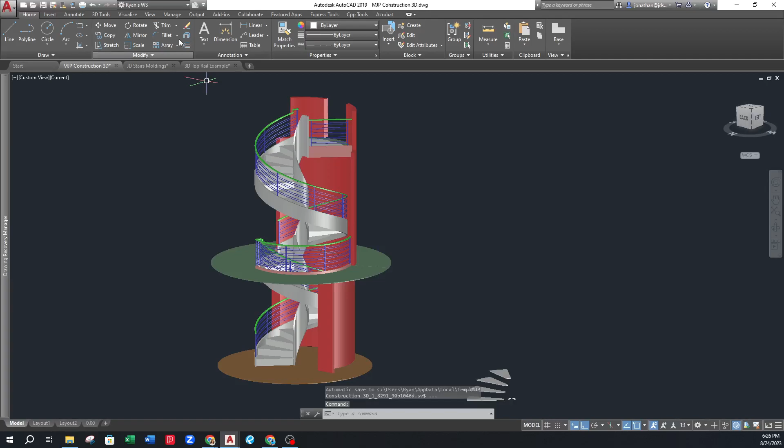This was just a stair that a client sent to me, and he was having some problems getting this rail to work. And so I thought I'd make a quick video on it. So I just copied these same treads over here just so we don't have to have a whole other model in our model while we're working.

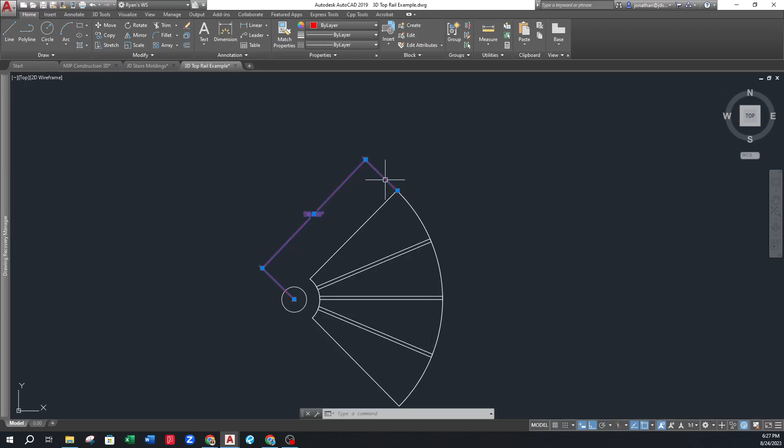So the first thing you want to do is you want to find out what your radius is, or wherever you want the center of your railing to be. So in this case, we're just going to use the outside edge of the tread for ease. But if you had a handrail that was here, let's just say it was 1 inch in, you'd want a radius of 57, if that makes sense. But for the sake of this, we're just going to go to the outside edge so you can see.

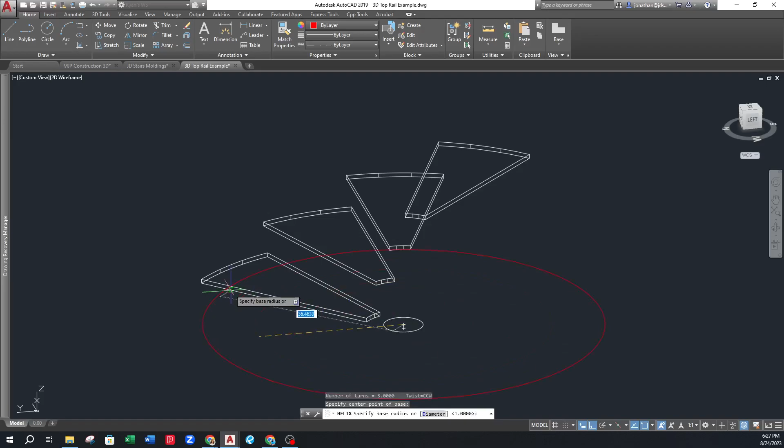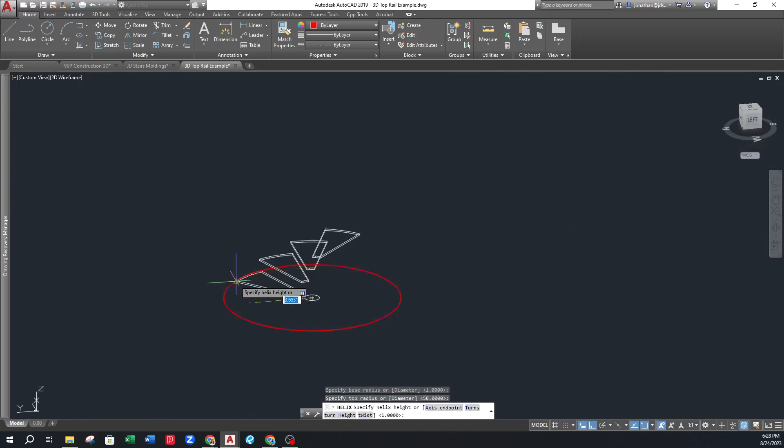So the very first thing you're going to want to do is you're going to want to draw a helix. And you want to make sure that you start your helix where you would want your handrail to start. That's really the only thing that you need to make sure of when you're doing this. So it's just asking me to specify the top radius or the diameter and the bottom radius or the diameter. Now, those don't really matter because you can change those in the properties later.

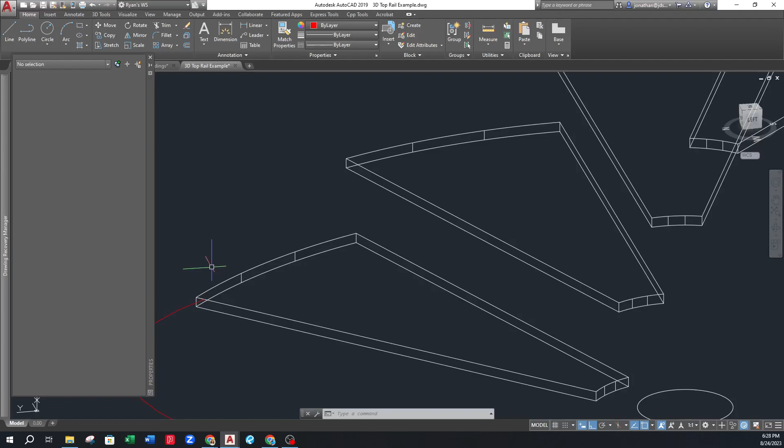Even if, let's say, I decided that I didn't want my rail to be to the outside edge, I could come here to the properties and say that I want the base radius to be 1 inch in. So I'm going to go 57, and the top radius, obviously I want the same, we'll say 57. And then now you can see that that is 1 inch in. You can also see that this is going counterclockwise, which is the opposite of how our treads are. So we can change that in the properties as well.

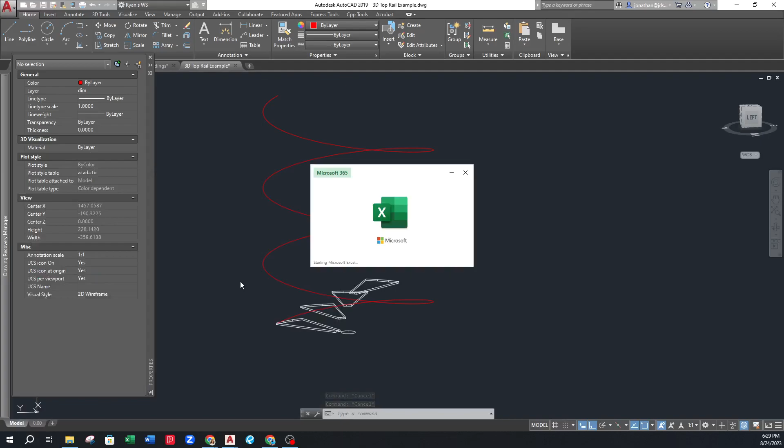Now this is the part where we have to use what we call our weight calculator or our spiral calculator in order to get our helix to what we want. So I'm going to go weight calculator. And this specific spiral had 16 treads around. The rise was 134.125. So this would be my helix turns. So let me see if I can do this. It's probably not going to do it on both my screens, but

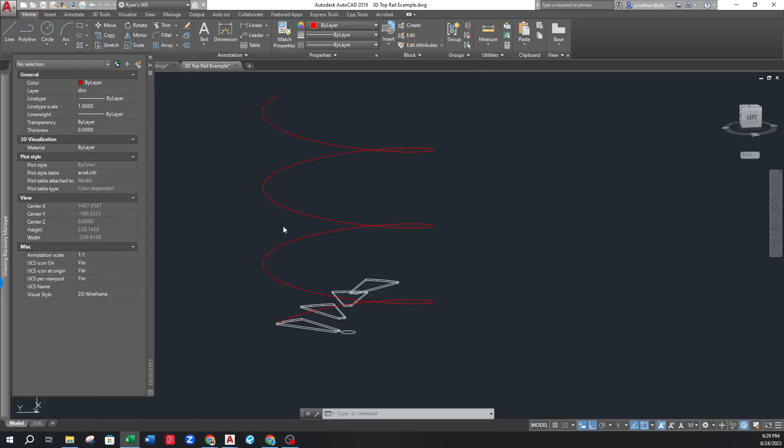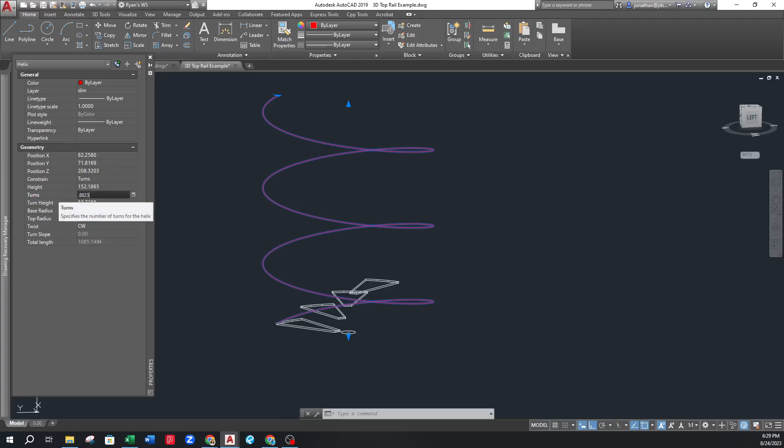so right here where it says turns and it says currently 3, oops, that's not what I wanted. You would want to put this 0.882353. So we're gonna go 0.882353, and we're gonna hit enter. And obviously this is not the height we want, so now we play with the height. So it's currently at 152. So let's try 118. And then that looks pretty dang close.

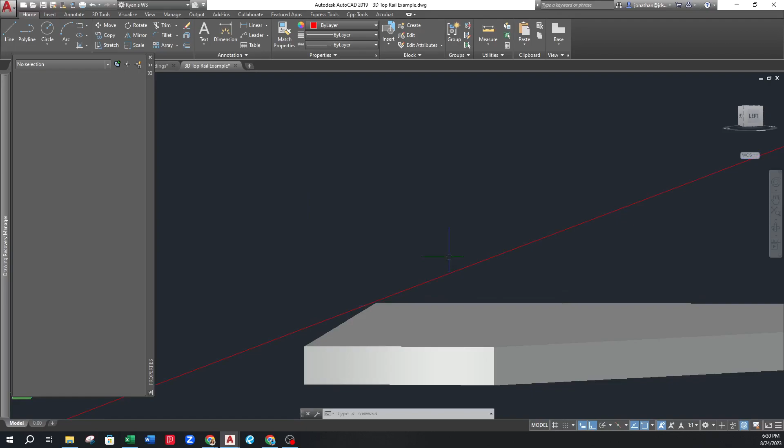Now you don't want it to be intersecting the tread, but you want it to be just right at the nose or right above the nose, because again, this is going to become your top rail. So the closer you can get that without it going through the treads, it's going to give you a better result. It's going to be more accurate. Okay, so now we have our helix. I'm going to move this out of the way here.

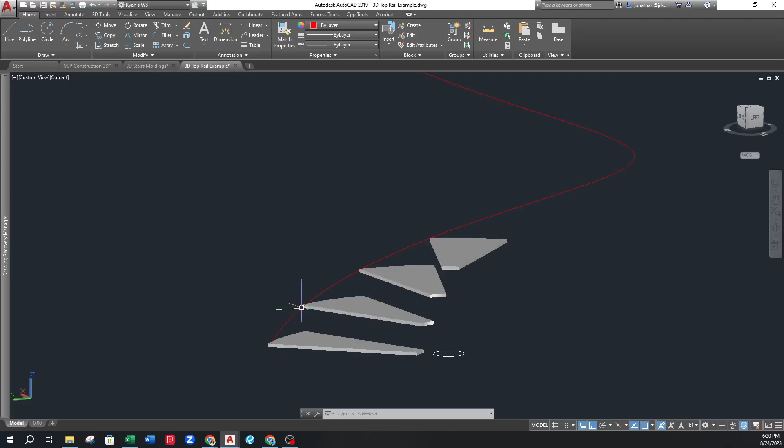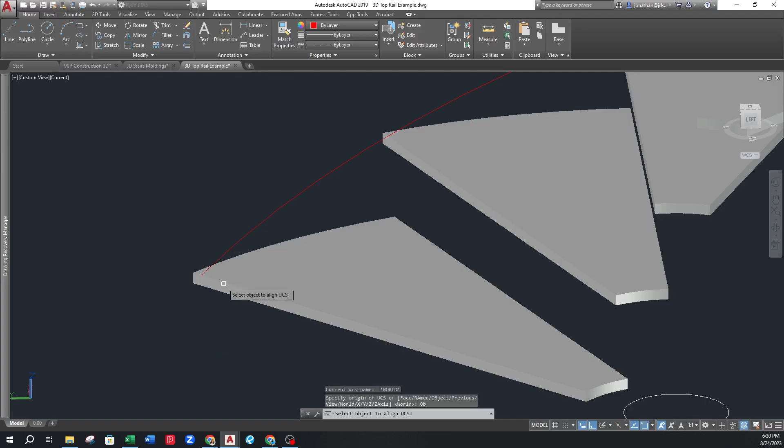So now what do we do? Well, we have to align our UCS with where we want our rail to start, which would be here, right? So let's see what it's doing right now. So you can see when I draw a rectangle, that is not the view we want. So how do we align our UCS? So on mine, I can hit 5 and select an object to align my UCS. But you probably don't have that, but in our company we do.

So you can type in UCS, and it's going to ask you to reassign the UCS origin. So we're going to put it right here. It doesn't really matter as long as it's along this plane. So I'm going to put my X this way. Oops, I don't think that's what I wanted. I think I wanted my Z to go back, yeah. So I'm going to do that one more time. I want my X here. Gosh dang it, why can't I get it? I want my X to go this way.

It's not working. It's giving me fits, isn't it? Okay. What is happening? Here I am trying to teach and it is not working. Okay, there we go. That's what I want.

So when I draw a rectangle, you can see that now it's drawing it as the same plane as the front of where I want my rail to start, or in this case, the front of the tread. So we're going to go ahead and just draw a rectangle. Let's just go 2.5 by 1.5. Okay, so this is where the magic happens. So I'm going to take my helix.

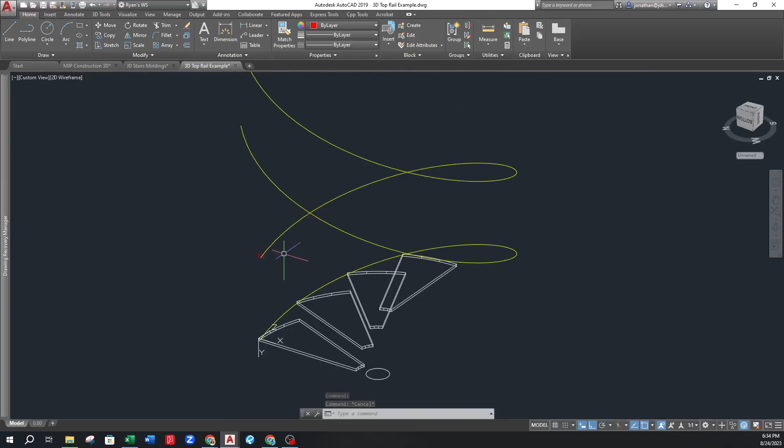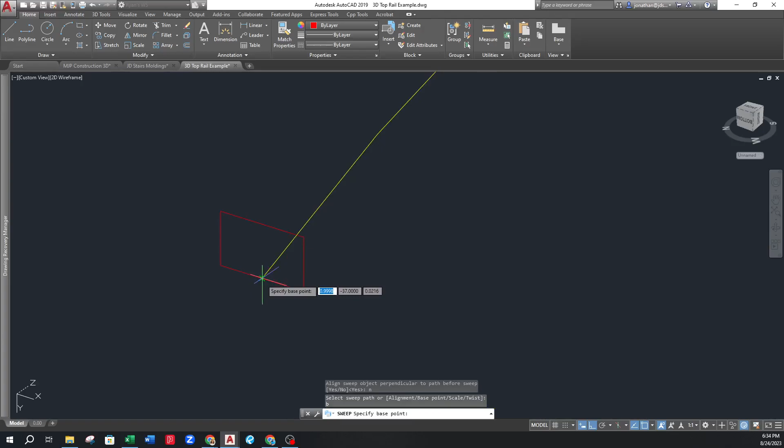Okay, so now you're going to type in the command sweep. You're going to select what object you want to sweep. Then you're going to come down here to where it says alignment, or type in A, and you're going to hit no. Then, before you do anything else, you're going to type in B for base point, or you can click this as well. And now you're going to select that point where those two are meeting.

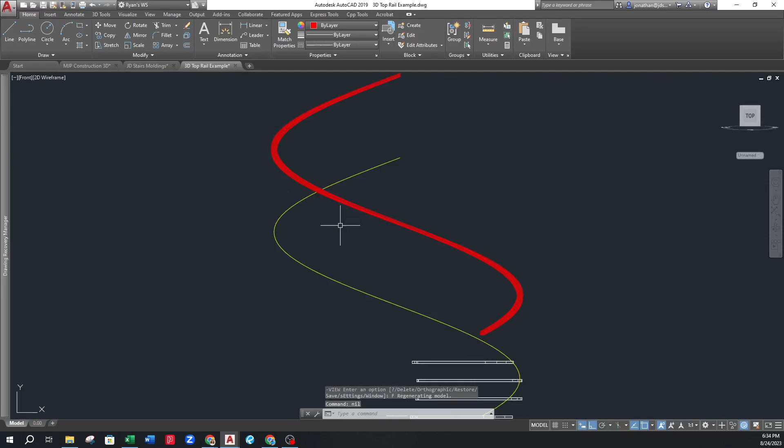Okay, now it wants you to select the sweep path. So you're going to select your helix. And what that's going to do is keep your rail nice and flat and not twisted, not distorted or skewed in any way. And a good way to check this is, I'm going to have to pull this out a little longer because I didn't draw mine quite long enough.

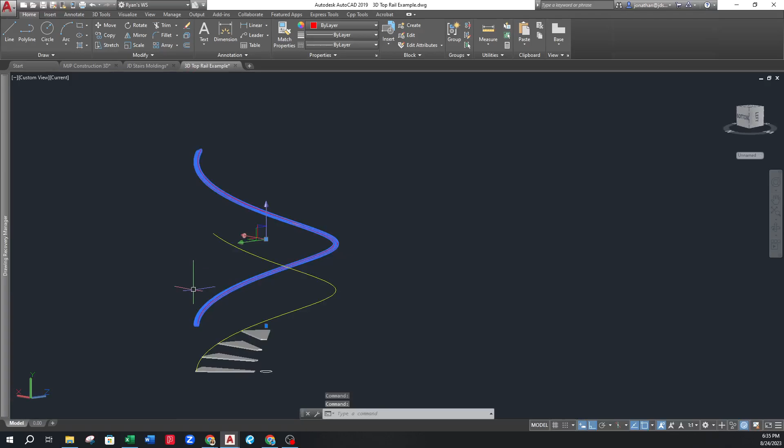But a good way to check this is if you can take this rail and copy it straight up, and I'm just eyeballing it here. If you can copy that rail straight up and it provides a seamless transition between where you started and where your rail that you had extruded originally ended, that's how you know your rail's not skewed. It's going to be perfect.

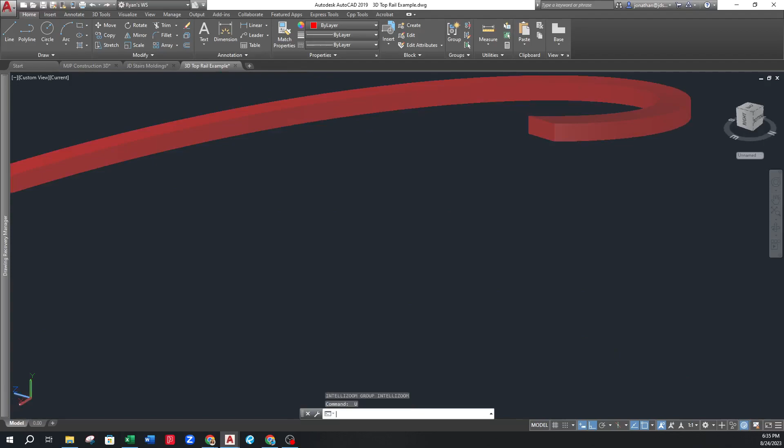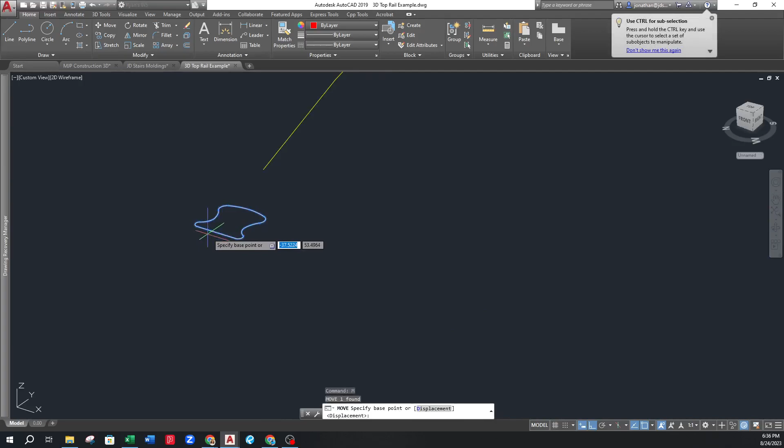So I'm going to do it with another shape really quick just so you can see how easy this is with, let's just say, a molded rail, any type of wood rail. Let's see. Make sure my UCS is good. Okay, and then I'm gonna paste this. I'm not sure if I'm gonna have to rotate that vertically or not, but we're gonna try it without it first, and then we will see.

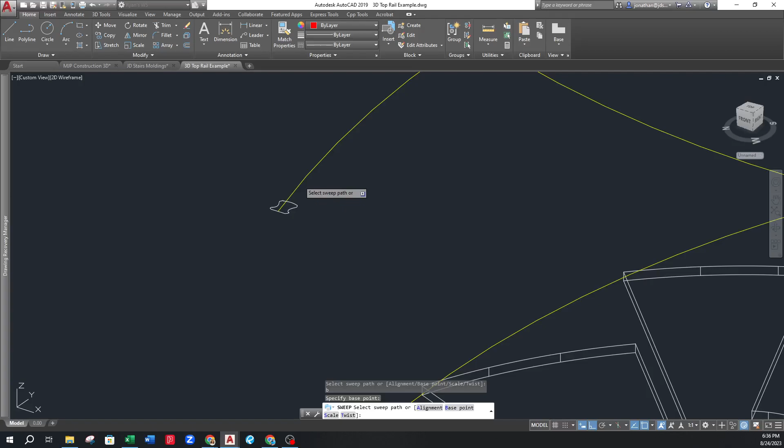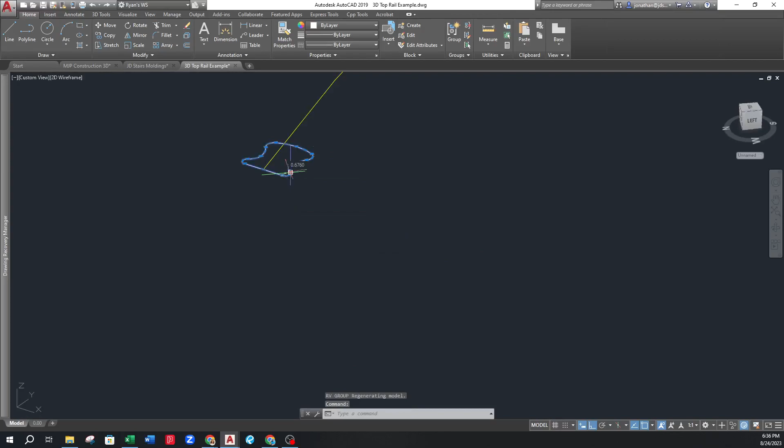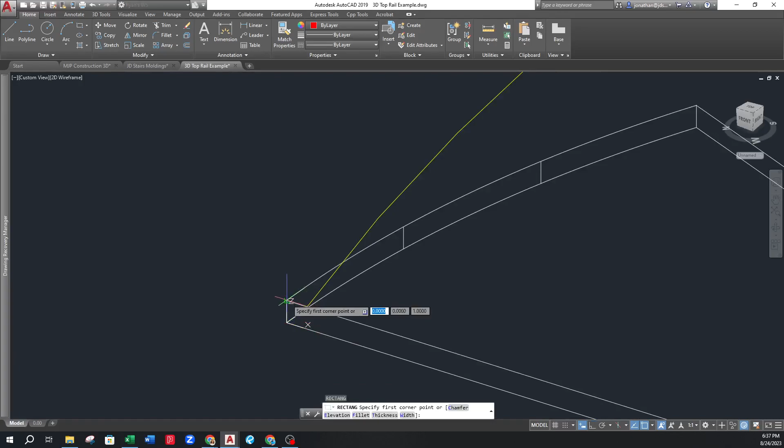We'll see if it goes. I'm not sure. Oh, please don't freeze. Yeah, I think I might have to rotate it vertically. Oh, that was not vertical, was it? Oh, that's why, because my UCS is all messed up. I don't know why my UCS is being so finicky today. Okay.

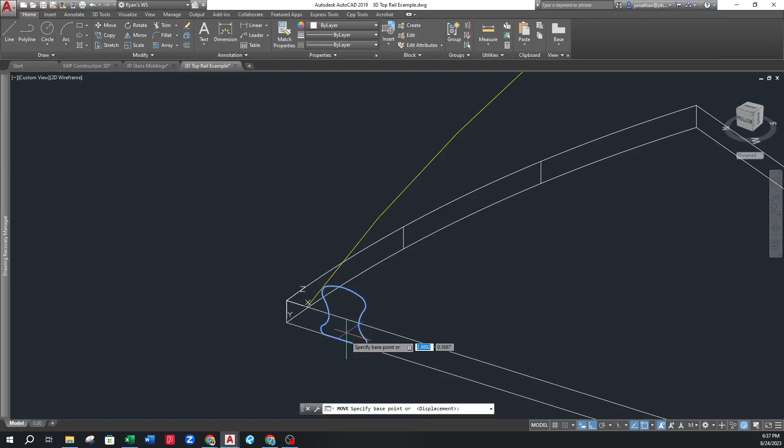Okay, so I don't know why my UCS was messed up, but you can see it pasted upside down, so then I just mirrored it. So you can see it's still along the same plane as where I want to start my rail. So I'm going to take this and put the bottom of this here, and then I'm going to do the same thing again.

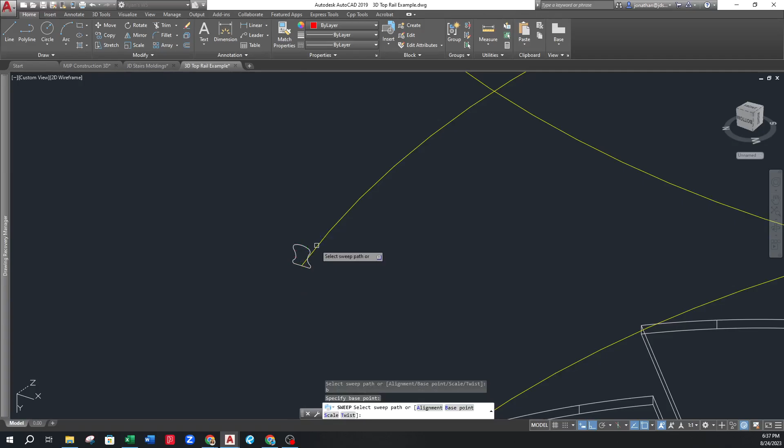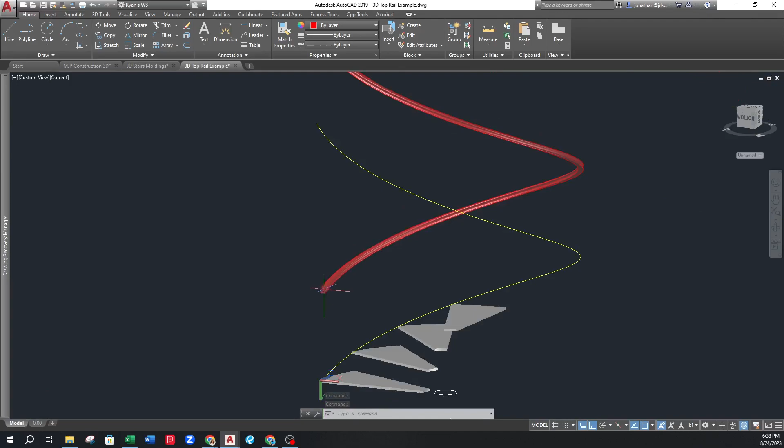I'm going to type in sweep, select the object I want to sweep, A for alignment, I don't want it aligned, B for base point, select here, select your helix, and then you can see that it's nice and unskewed. Perfect top rail, literally 10 seconds from the time I got it pasted in the right way to the time I have a fully extruded wood top rail.